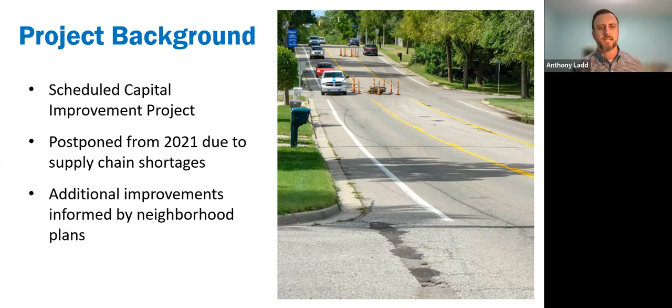Like I said, this project was postponed from last year, and this is a corridor that we've recognized from several aspects: road condition, the condition of the water infrastructure underneath the road, and also, I think we'll get here in the next slide, something that was highly talked about and planned for in the adjacent neighborhood plans that exist.

There are three neighborhoods directly affected by this project: Oakwood, Oakland Winchell, and Parkview Hills. In neighborhood plans and conversations with each of these neighborhoods, I think there was a lot of concern about Parkview Avenue in general—whether it is non-motorized transportation, traffic speeds or road condition itself, low-hanging limbs, vegetation, you name it. There's a lot of attention on this project for this street, and we recognize that, and we were able to capture a lot of that in this project.

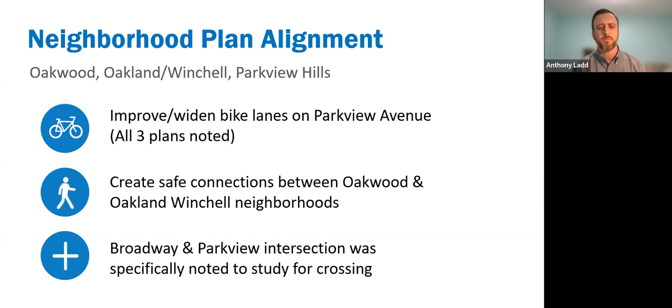A couple of things that were specifically mentioned as well was creating a safe connection between the Oakwood and Oakland Winchell neighborhoods, and the Broadway and Parkview intersections, which we'll get into a little bit more as well.

So that was the background of how we got here today. I want to talk for a second about the different facets of this project that make it great, but make it complex from a scheduling aspect, and also how that impacts traffic. We'll get into that a little bit later as well.

Anytime in the city when we're looking at water main that is an ideal candidate for replacement, we work internally to make sure that all of our assets are being addressed in these corridors if they can. Again, not going to be a surprise to many of you, we did a project similar to this on Oakland Drive between Parkview and Howard Street.

We did that same thing 2 years ago on Court Street, and last year we did a project on Portage Street, where we are combining our funding and combining the work that needs to be done so that we can have an efficient project, really get in there, get everything taken care of, and end up with a better street that we aren't coming back to make water main repairs for the next year, or having to repave and inconvenience affected residents and businesses again.

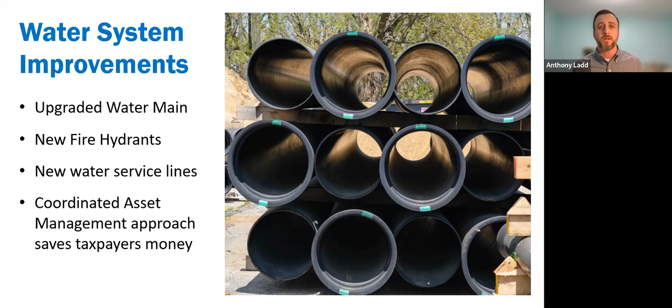Above ground, we will be repaving and restriping the road. Again, the limits of this project will be from Tamsin, which is just west of Greenleaf Boulevard, to Oakland Drive. In addition to a new driving surface, we will be implementing what we call right sizing the vehicle traffic lanes. And that does a couple things for us.

One, that's an effort to right size our bike lanes as well. In the city, depending on the age of the street, we have some bike lanes that are narrower than others. So when we're doing these projects, we're addressing that bike infrastructure on the road so that we can right size that and right size the travel lanes as well. Some factors that go into that are the type of traffic that we have, the posted speed limits, the speeds that are being observed, and really the function of the road.

And this is again another project where we're getting into the habit of doing more of these, really looking through that complete street lens for each of our projects. Just at the end of this year, we were able to complete our very own City of Kalamazoo street design guide that incorporates a lot of these factors and takes into account the use of the road, the affected area, and really what our intended purpose is, to make sure that we're addressing all of these asset classes in the road, and that we're addressing all users of the right-of-way space.

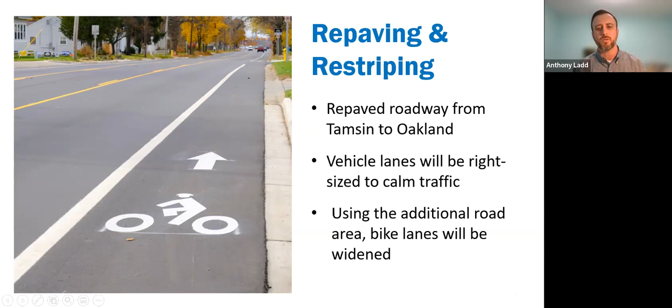In addition to the resurfacing along Parkview Avenue, one of the things that personally I'm extremely excited about are the pedestrian improvements that we're able to add. There are a lot of residences, a lot of sidewalks, a lot of parks in this area, a lot of great places for people to ride bikes, to walk, to exercise, and having this pedestrian improvement is going to be a drastic change to this corridor.

Currently, the only two places to cross that are designated through pavement marking or a signalized intersection are at Greenleaf Boulevard and at the Oakland Drive and Parkview Avenue intersection. So it actually works out from an engineering stance. One of the best places to cross, where you have the flattest grade, the most sight distance, and existing pedestrian infrastructure, is at Barnard and Parkview Avenue and Broadway to the north there.

So what we intend to do is build a pedestrian island, which will be just west of the Barnard and Parkview Avenue intersection—not so close to that intersection that it would interfere with vehicles pulling out of Barnard going west, but just a little to the west so we can make that connection where there's existing sidewalk at Barnard across the street to Parkview Hills. For those of you familiar with that area, there's no sidewalk across the street. Well, we intend to change that as part of this project.

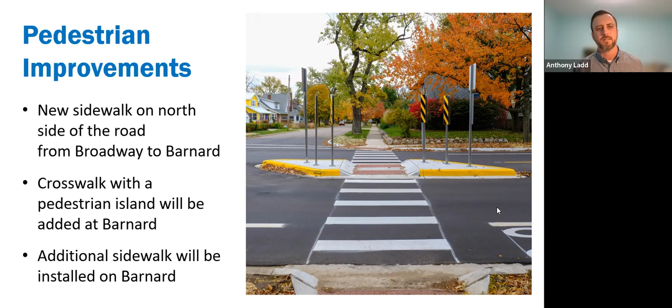This is an illustrative map of the work we intend to do for this project. As mentioned, you can see the pedestrian improvements about halfway between Greenleaf and Oakland, and the repaving and restriping, right-sizing the travel lanes to accommodate both vehicular and bicycle traffic in a safe manner.

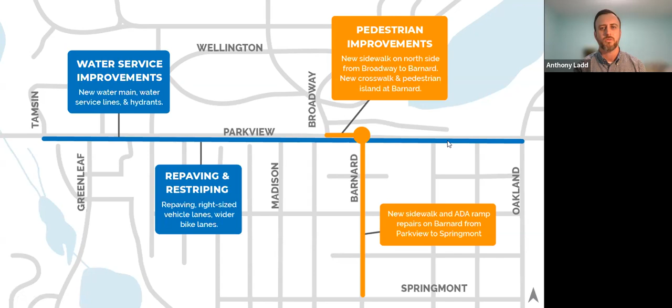The water service improvements are much needed along this corridor, to replace an aging, smaller water main that has been prone to water main breaks in the past. And again, with our sidewalk on Barnard that we completed last year, we intend to build on this year as well.

So that talks about what we're going to do as part of this project, but now we can talk about the when and what impacts will be done to traffic, probably what many of you are curious about.

Construction will begin on March 21st. Typical policy for our construction projects is 2 weeks before, the contractor will place portable message boards alerting traffic that construction is going to start, and that there will be impacts to travel. In that 2-week time frame, you will start to see construction signs and detour signs go up, and we will be doing media releases, putting out information on social media and through other means to alert traffic that this project is going to start.

Monday, March 21st is our anticipated start date after conversations with our contractor. We will begin phase 1 immediately, which is anticipated to take about 2 or 3 weeks. Once that phase is complete, we'll move into phase 2, which will account for the majority of this project, taking us to the end of October, middle to end of October. We'll stay in that traffic pattern through summer to the end of construction.

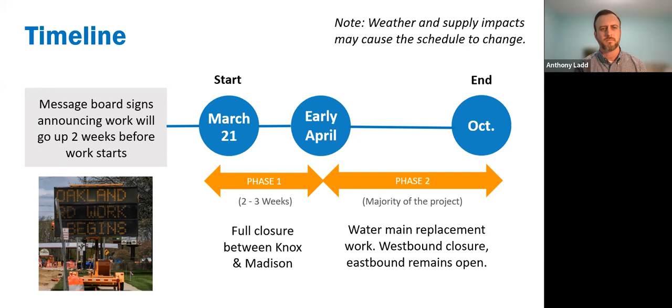Phase 1, starting March 21st, will begin with a full road closure of Parkview Avenue. Fortunately, this is in a very small portion of Parkview where there really will not be significant local traffic impacts, in that residents will be able to get directly to their house. There will just be a hard closure where you cannot drive from one side to the other on Parkview Avenue.

Again, our traffic detours will be put in place to detour commercial traffic and through traffic using Drake Road to Stadium, Howard, Oakland, back down if that's their final destination. It's anticipated, similar to our other projects, that traffic will go in other directions once they get to Drake and Stadium, or Howard and Oakland, to reach their final destination. But this will be a full closure.

We will have type 3 barricades at Drake and Parkview, and at Oakland and Parkview, to signal to through traffic, commercial traffic, and non-local traffic that this road is closed. We call that a soft closure, in that local traffic will be able to continue on this street, but you've been warned that you cannot go through one end of Parkview Avenue to the other. At that point, after the 2 to 3 week time frame in April, we will move into phase 2.

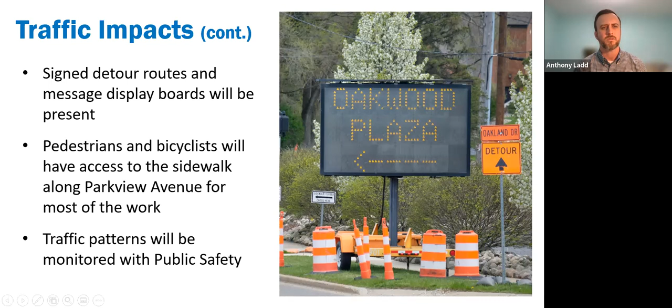We're committed, in public services and also working with public safety, to observe and monitor those conditions, make changes as needed, really put to use temporary traffic control and some of the targeted enforcement methods that public safety uses, just really making sure that we're observing traffic, understanding impacts to local roads, and making adjustments as we can.

Water service impacts for all city projects: we have a very good line of communication with the contractor and our consultants that will be on the job inspecting the entire time, Hurley Stewart.

We want to make sure that we are coordinating any anticipated water shutoffs in order to tie into a side street, make a connection. There are times where we will have to cut that water off for a very short amount of time and then turn it back on once that connection's been made. Again, that's an anticipated, planned procedure, so we know that information.

We try for at least a 48-hour notice that we get out ahead of time and can put that information out to the community. Once that water comes back on, or if there is an unanticipated disruption to water service, we will issue a boil water notice. Typically, I think we put those out immediately following the event, and then we notify the public when the boil water notice is over as well.

Eric, tell me if I'm wrong, but I think we usually plan for a 72-hour turnaround, or we notify them to anticipate a 72-hour turnaround on that. That's correct, typically 72 hours. And again, if it's more or less, we put that back out, but that's the anticipated amount of time when these boil water advisories are issued.

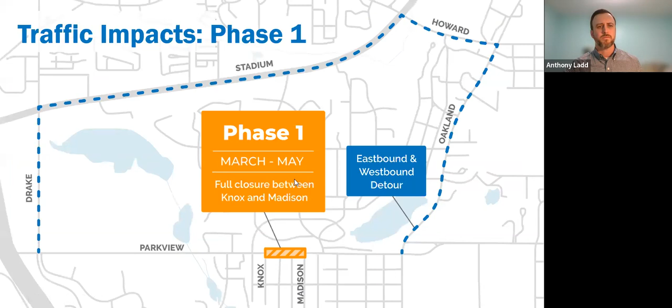This might be a two-part answer as well, because I know that some conversation was had with public safety on their end. I do think that when you look at traffic patterns of vehicles coming into the city, there are more nodes, what we would say, more points of interest, whether it is a resident or a business or school or place of work, in that eastbound direction. That drove, when we were having these conversations, that's what we were looking for primarily.

Yeah, I agree, Anthony. I think what we really want is we're looking at the Oakland corridor and certainly the corridors further to the west, serving north and south into the city, and being able to feed traffic directly over into the east to those major corridors is one of our objectives. It's a way to try to at least get people out to those main roads that a bulk of our travel is on.

All right, thank you for those answers. So moving on, will there be a long-term speed limit reduction on Parkview as a part of the project?

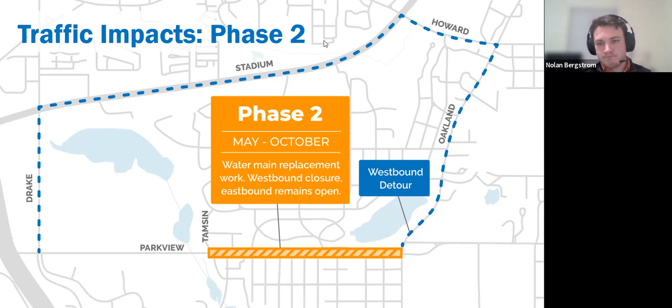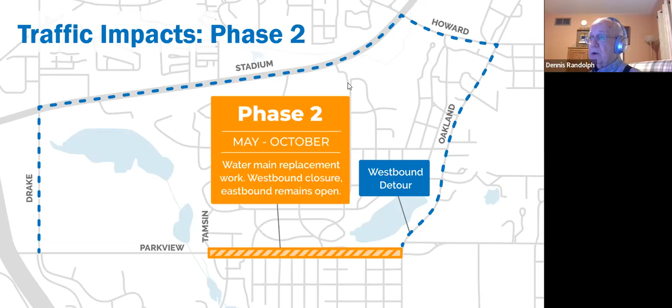We aren't anticipating changing the speed signs right now. Again, what I'd like to see is how our changes in the lane widths impact speeds. I will tell you this, and I just had a conversation today with the city planner about this, I think in the next few years we're going to be looking citywide at what speed limits are and how we might address them.

Speeding is a serious problem in Kalamazoo. 30% of our crashes are directly related to speeding every year. So I've got a real concern. But the practical side is that just because we put a sign up doesn't mean that people slow down. And it places a real burden on the police to enforce when people just don't seem to care about the signs.

I think we're getting ready to gear up and do some real study and discussion about speed limits in general, and certainly that would impact Parkview. Like I said, we'll take a look at what happens after we get our job done and traffic returns to normal, and see what's happening with the speeds and go from there.

Certainly, and to build on that, anytime we get the opportunity to mention speeding or traffic calming elements, or even public safety enforcement, I think it's worthwhile to mention that not one of these components by itself gives us the result we're working for. Traffic calming, speeding, it's driver behavior, and when you're looking to change that or bring awareness to the issues we're seeing with speeding, or not stopping at stop signs or stoplights.